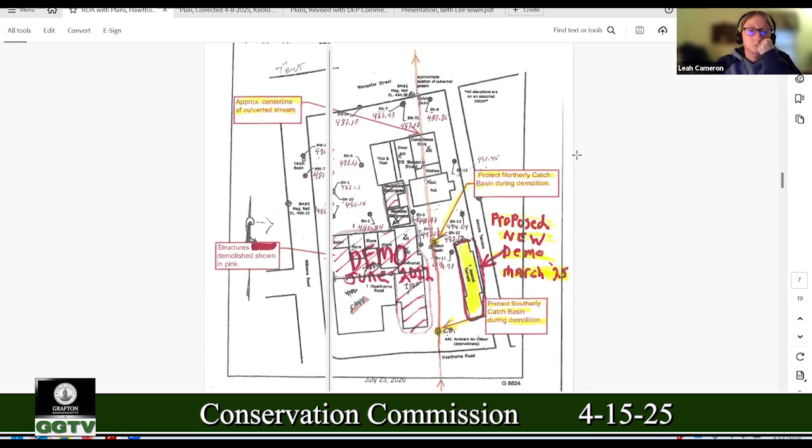Tried to open that one and oh, there it goes. I was gonna say I saw the. We're having weird PDF problems. If you guys ever can't open stuff, let us know. We just got a new Adobe license, so okay, because I was having all sorts of issues getting. Oh, yeah, that's okay, please let us know. I was troubleshooting some with Amira the other day.

Okay, right. So that's a pretty typical silt sack. So he's got a silt sack around, and then he's got a piece of plywood over the top of it, or a weight of some kind. Is that what was the other picture? Right.

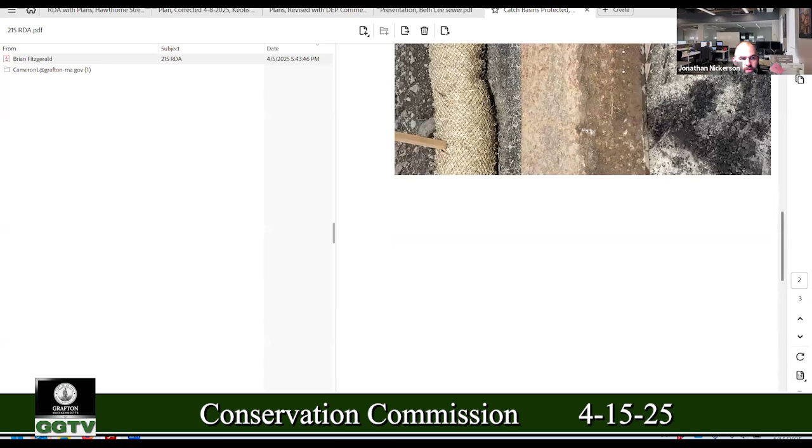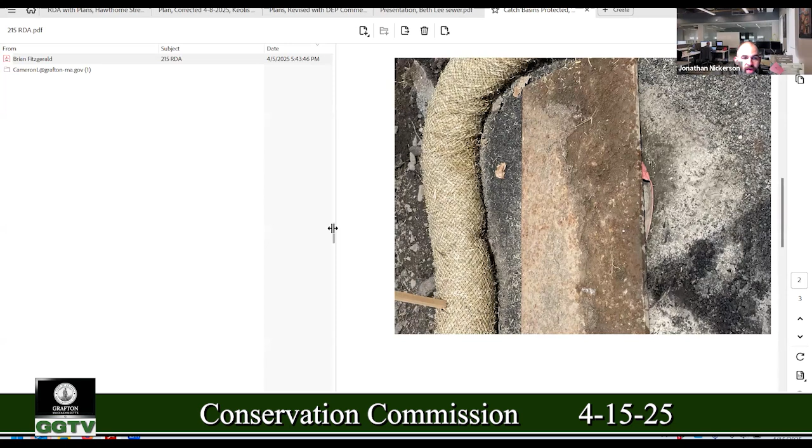Looks like a piece of, I don't even know what that is. Looks like plywood. Yeah. I mean, obviously it rained a little while ago, so I don't know if this will allow water in but not debris. It seems straightforward enough. I'm not trying to make a big deal, but I just didn't know how it was going to work and how long it was going to be in place.

Yeah. I would agree with you that the issue isn't the silt sacks, it's putting something on top of it if it reduces capacity to get in. Yeah, or it might create a minor flooding problem or something if you're not getting enough water into the catch basin, especially with these flash little storms that go by. So I don't think it's an end all. It might just be an adjustment to what he's done with the weight.

I like the idea of trying to keep debris out of the catch basin. And then he's got double silt protection with the hay or the straw wattle and the silt sack. Yep. I don't know if in the past we've done something where the weight is not necessary. I don't know if he put this cover over it because he may have equipment going over it, which is a steel plate where you have it there when you need it and so forth.

So it's not like it's connected to anything. Right. I'm just assuming that when work was not going to take place, he'd probably move the steel plate so the catch basin would work. And then if the work is taking place, he'd have the steel plate over it. But I don't know if we can also just add a condition to our approvals to say that, during rainstorms, the plates need to be taken off to allow for a free flow to the catch basin.

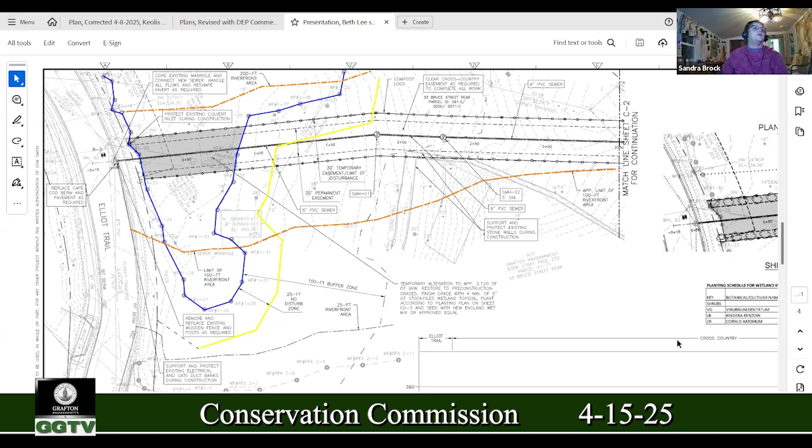So I do have one other question, more of a technical question. Looking at your profile, you're showing that you have done borings out there and so forth. And on the one closest to the existing sewer manhole at the lower end at Elliot Trail, I don't know if it's seasonal high, but the groundwater indicated here is fairly high, obviously, because there's a wetland right there. The piping and the connections that you're using, is there anything special that you're doing to make sure that it's watertight?

So we would be utilizing PVC pipe, which has 14-foot joint spacing, with gaskets to make it watertight. And then the connection to the manhole, we would be recommending a rubber boot, which is watertight as well. So yeah, the intent is definitely to keep out groundwater infiltration. All right, thanks. So the fact that you're using gaskets is the key part that I was looking for, as opposed to push-on or something else. So that was all the questions I had. Leah, you want to do your report out?

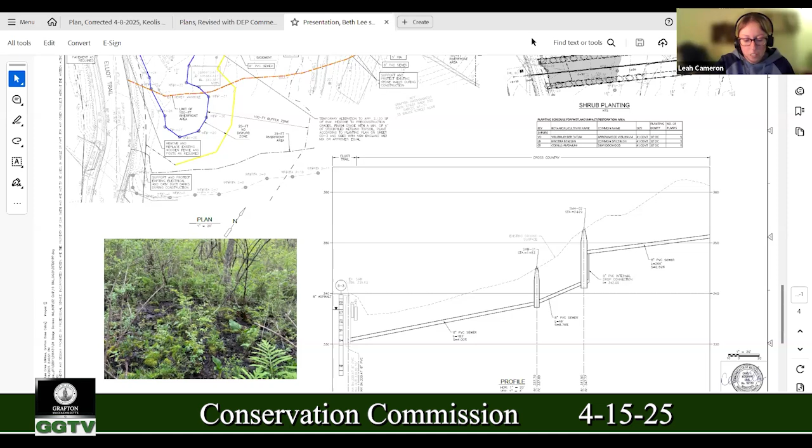So they are still waiting on their DEP number, so we won't be able to close tonight. I did also check the CR that we have in the works with Highfields for the open space, and there is language in there reserving the right for utility easements, so that won't be a problem. Jan, if you can pull up the GIS map for this area. The one question I wanted to throw to the commission, or maybe also to the applicant, is proximity to a potential vernal pool on, maybe not 42 Magill, maybe it's the 33 Bruce Street rear open space. And I just wanted to know how close this is going to be to that vernal pool, and then throw to the commission if they wanted to consider requiring exploration and or certification of that pool.

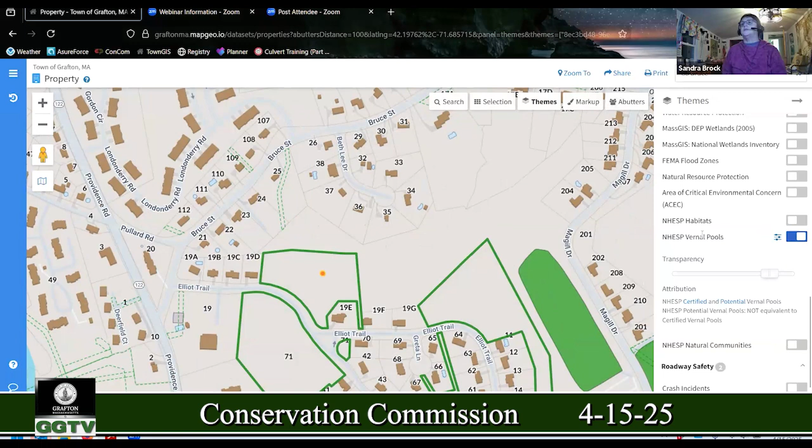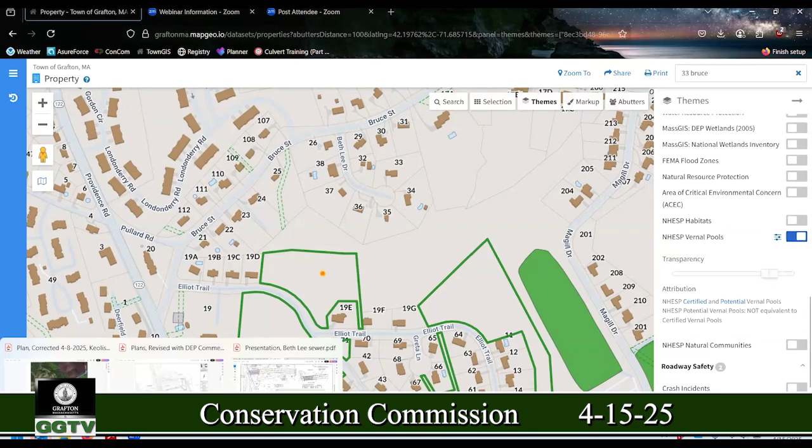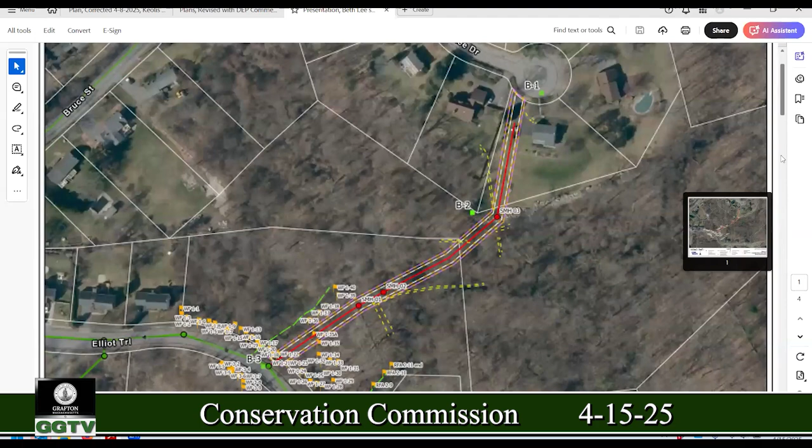Is that a potential vernal pool or a certified vernal pool? Potential. Potential, yeah. I mean, I did not see any indications of, well, there is one area that does pool water, but it's not located that far up. If you go back to the plan, I can show you where it is. Just go back to the sheet, the design plan. See where it says limit of 100 foot, right at the lower end of the blue? That's where there's a little pooling of water.

So I think the one question that Leah's asking is, obviously there's a GIS location on it, and we're wondering how close it is to the proposed work. So it would be, I would say, probably 50 or 60 feet. Okay. So the question is, if it is that close, then it's probably worth just looking at it.

I don't know if it's the right time of year. Actually, yeah, it would be exactly the right time of the year. So at least you could do an assessment of it to understand it. Yeah, I'd be happy to. And then I don't know if that would change anything that you're doing from a construction standpoint, but again, it may just mean during certain dates of migration and so forth that you might not do anything. But other than that, it's really about understanding the location of it, how close it is, whether it is a vernal pool or not. That would be very helpful.

Yes, I can certainly do that. Anything else on that, Leah? Nope, that's all I have. Okay. So at this point, just to kind of recap, we've been presented the technical and the wetlands components of this. And what we'd like to do now is open up to any of the abutters or any of the public, if you have any questions about this particular project or any specific questions about what the process is going to be. Give you a little preview.

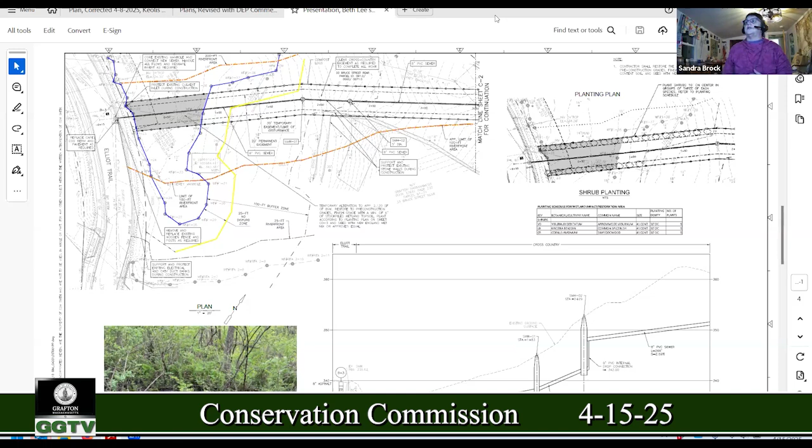So with that setup of what's coming up next, if anyone has any questions or comments, please raise your hand, even if you're just looking to make some comments on this particular project. So Jan, I'll leave it up to you. We have John Riches raising his hand. Please do your thing. Okay, can you hear me? Yes, I can hear you. Excellent. John Riches, 7 Elliot Trail. Thank you. You have the floor.

The proposed project is right next door to my house at 7 Elliot Trail, so I'm probably the most interested person in the neighborhood. While you're checking the abutters list, I wondered what the rules are, because we talked an awful lot about the Beth Lee property and then the McGill land, but the biggest part of it is what you've been referring to as a rear lot from Bruce Street, which is actually part of the Hassamasset Village neighborhood that I live in, and it's owned by the 67 homeowners here. So I have no clue whether the abutters list included those 67 homeowners, because it's their property. We're not actually abutters, we're actually part of the project.

So that's one comment. The second comment is, when I did look through some of the plans online, it seemed to talk about putting stuff back to the conditions that there were before. But now what I'm hearing is it looks like we're going to have a 20-foot road through the open space straight up to Beth Lee, to the backyard of somebody's house. That's going to be planted maybe with some grasses, and it will require access from Elliot Trail, not up the terrible hill in the back of Beth Lee. So it's going to require the easement, which has not been established yet. And as far as I know, you don't have permission or an easement from the homeowners or the homeowners association to do that.

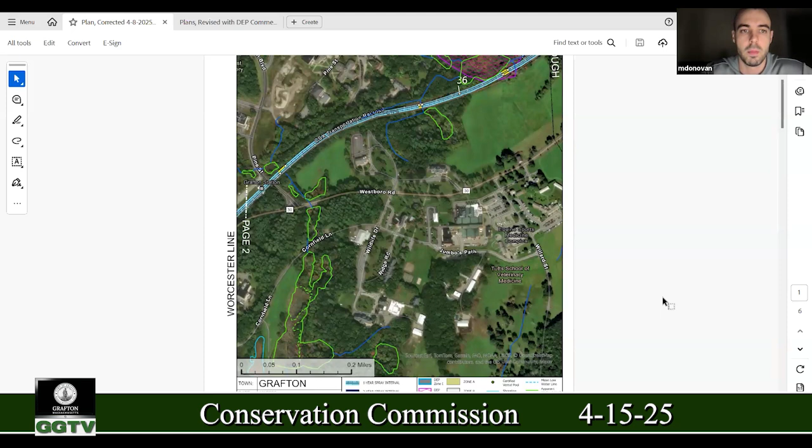So I'm happy to answer any questions about the maps or the work that's done each year, but we are seeking a positive 2A determination to confirm the maps, as well as a negative determination for the work included in the vegetation management plan. All right, thank you very much. I'm going to go to Leah since she has a good report to read out. We do this every so often, but Leah, if you want to just educate us.

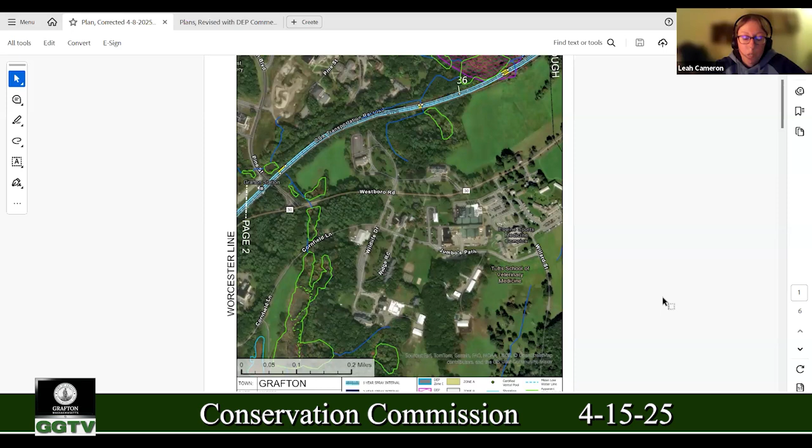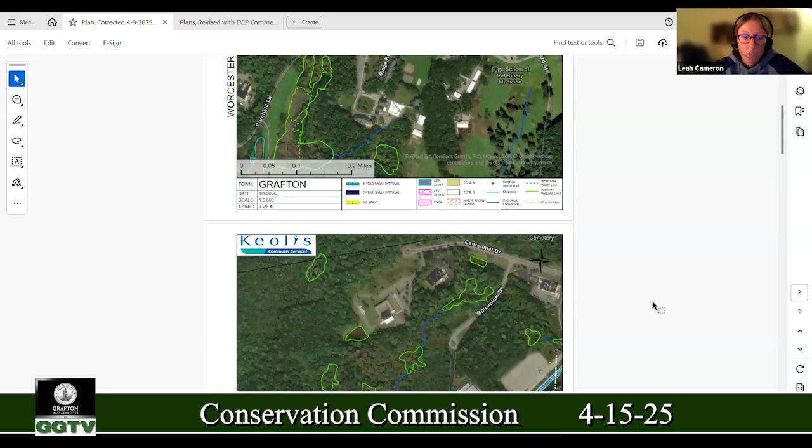Sure. So this filing is under the act only, not our bylaws. We do issue determinations for vegetation management plans in 5-year increments. So this would be a 5-year determination as opposed to the usual 3. The data that they're showing on their maps matches what we have. I have one question on page 2. The area to the west kind of shows yellow on the south side of the tracks, but not the north side.

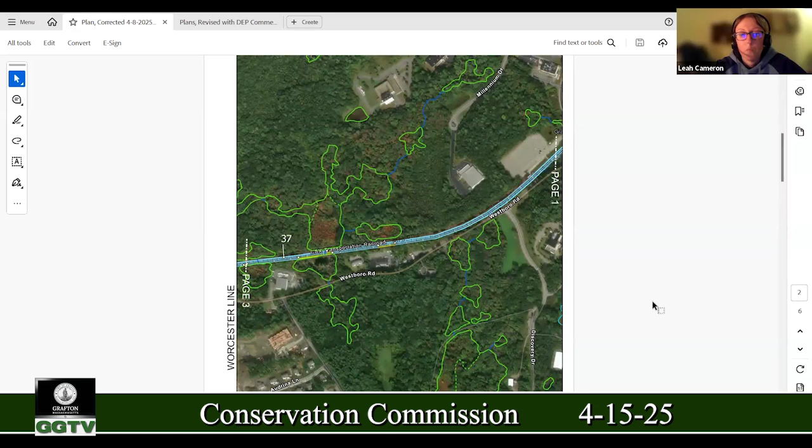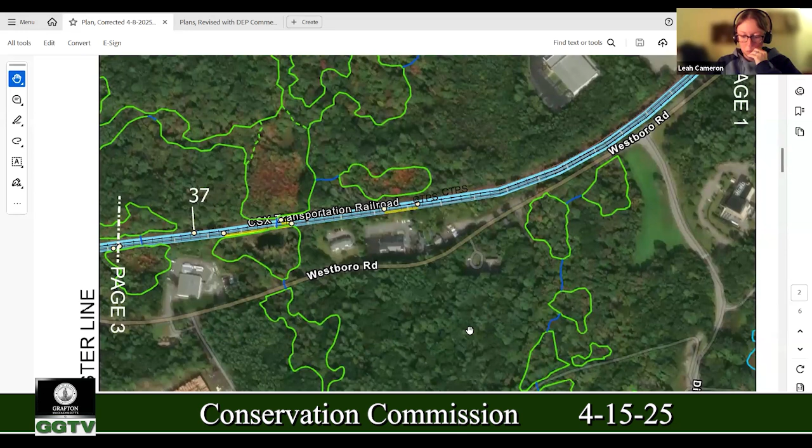Jan, if you can maybe zoom in around where you can see the label of Westboro Road. Zoom in one more time. It's right in the middle of your screen now. The reason I'm asking about this spot is there's a potential vernal pool there, which we might need to compare to the GIS because I don't see the dot for the pool on their map. Sorry, I didn't give you a heads up there, Jan.

So in this area, I would think that in the field, on the north side of the track where it's blue, the wetland would be more than 22 feet away from the center line of track. And when I say 22 feet, it's because from the center line of track, we're applying the solution to 12 feet, and then you need to keep that 10-foot buffer. So when these areas are marked in the field with the plates, that's what we're looking for. So I would assume on the south side of the track, it's within that 22-foot buffer from the center line of track, as opposed to the north side.

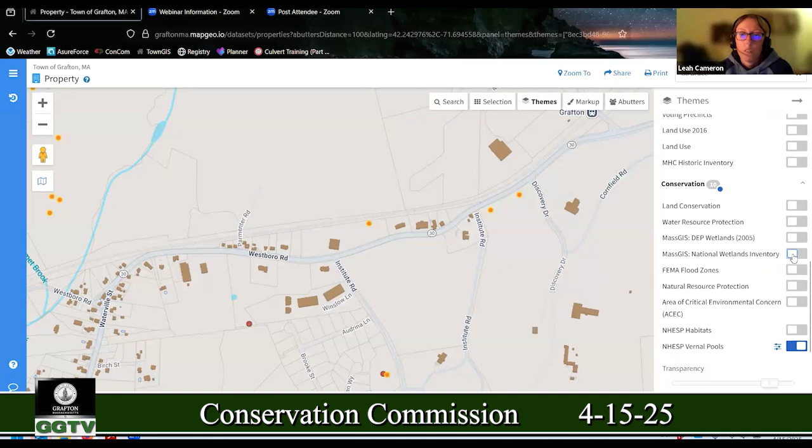And then obviously at the culvert, both sides are yellow, near where it says CSX Transportation, in the TRA area of the transportation word. Does that answer your question? Probably. I just need to take a quick look at the GIS if you're able to pull that up, Jan. Just don't quite remember where it fell. If you can turn on the National Wetlands Inventory, then the shapes should match.

Okay. So it's the one to the right, let's see. Institute. Yeah. Right. The one in the light green. Yep, pool. That was the one I was asking about. So if we can correlate that back to the plan. It looks like there was a yellow area there. Nope, it goes just to the right of that, just where the CTP is. It looks like you can see on the aerial that there's a flat area that could potentially be a vernal pool.

Hold on, it would be good to just overlay it, yeah. Let me see the building, and let me look at something in the background here. Oh, Institute Road is over here. Okay, this has Discovery Drive on it. I'm wondering if I called out the wrong plan sheet. If you want to do your questions while I figure this out in the background, sorry about that.

Sure. Again, this is something we do on a regular basis. It's great that staff goes through this with a fine tooth comb. So I will go around to see if anyone has any comments or questions. I'll start with Travis since I kept calling him out the last time, but this time I can actually call him out. No, I don't have any questions. Okay. Amira, do you have any questions?

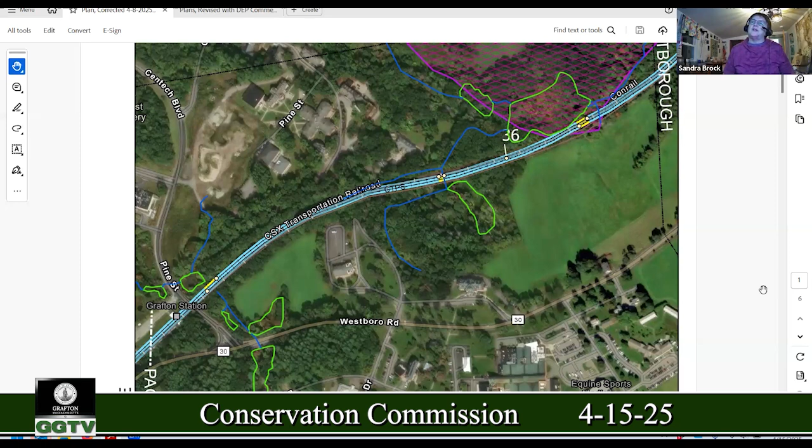All right, great. Jonathan. I don't have anything. Yeah. Thank you. I don't really have any questions. Leah, anything else as far as the vernal pool? I think I was off on the new construction. I figured it out. Yeah. If we can go back to sheet 2, it is sheet 2. I was just confusing the road with the railroad. So the potential vernal pool is just south of where it says CSX. Okay. So on GIS, it is the one in the light green pool.

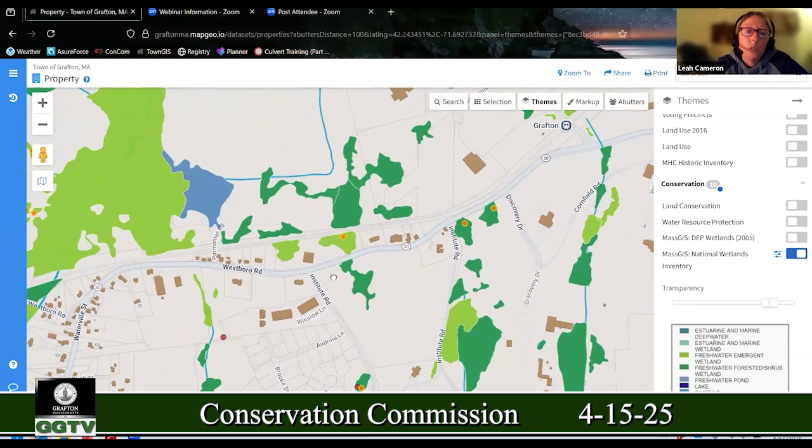And if you go back to the plan, see the words CSX on the track, and then south is like a nice open pool of water. It's that. So the yellow does correspond with that. I was just thrown off by Westboro Road versus the train track. That was all. Gotcha. Not a problem. And just while you did bring that up, I did go into the regulations to confirm that for vernal pools, you do need to keep that 10-foot buffer as well.

And just to also add, we do send these maps to NHESP every year. We send a yearly operational plan with the maps to NHESP, just to add to that. All right. So Leah, anything else if you want to go through your report? Sure.

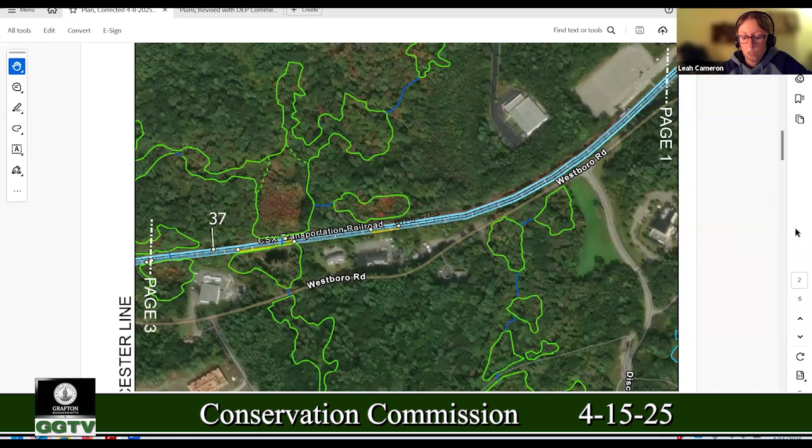So I listed 3 provisions from the regulations that we can cite as findings. 2 of them point to basically the process that they're going through tonight, which is to obtain a determination from us for the boundaries. Those are the first 2 citations. The bottom one is the citation that shows that they're exempt from the riverfront requirements. So I would suggest putting all 3 of those in a finding. I'm also recommending the issuance of a positive determination 2A as requested, that confirms their resource areas. And also the negative determination number 5, which again points back to the exemption from those riverfront regulations.

All right. I don't have any other questions. I'll just open it at this time to the public. If anyone has any questions or comments about the RDA for the CSX Railroad right of way, please raise your hand. Otherwise, I'll do a quick round of commissioners to see if they have any other questions. Jonathan. Nothing else. Thank you. Travis. Nope, nothing else. Amira. I have one quick question. I'm sorry if this has already been mentioned, but what herbicide were you all planning to use?

It varies every year. There's a list of maybe 10 or 15 herbicides provided by Mass DAR in association with Mass DEP. They've done studies with these herbicides and only provide the ones that pass their test. There's a lot of research behind it that tests the absorption rate and the flow rate. So

from that list, the applicator will make a mixture every year, and it does vary. What I've been told, to put it simply, is that they vary from this list every year, because the vegetation can build up a resistance if you use the same exact mixture every year. But we do provide the exact mixture to your commission in the yearly operational plan that we send every year.

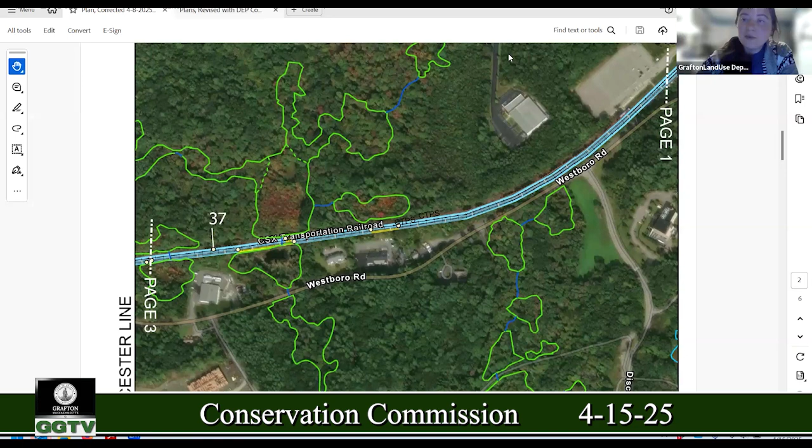Awesome. Thank you. No other questions. All right, great. Other than that, anyone, Jan, from the public? Nothing from the public. Okay, based on that, Leah, I don't think we have anything else. Nope. Okay, so then we're looking to a motion that includes what we already discussed as far as the filings and determinations. Do I have a motion?

I'll move to close the hearing and issue a positive determination, number 2A, and a negative determination, number 5, along with the other findings as discussed. Thank you. Do I have a second? I got a motion, a second, roll call vote. Travis, since you're on my screen. Yes. Jonathan, yes. Amira, yes. And I'm also a yes.

Alright. Thank you very much, everyone. Have a good night. You too. Thanks, Leah, for having everything prepared. You're welcome.

Okay, so next up is, I just need to bring the right thing up. Here we go. Next one's a continuation on 200 Westboro Road. I'm going to read this in. At a certain point, I will recuse myself, but they've got a little bit of housekeeping to take care of. So, pursuant to the Massachusetts Wetlands Protection Act, Grafton Stormwater Management Bylaw, Grafton Wetlands Protection Bylaw, the Conservation Commission will hold a public hearing to act upon a notice of intent application for a Grafton Stormwater Bylaw permit and application for a Grafton Wetlands Bylaw permit for the construction of a parking lot at 200 Westboro Road.

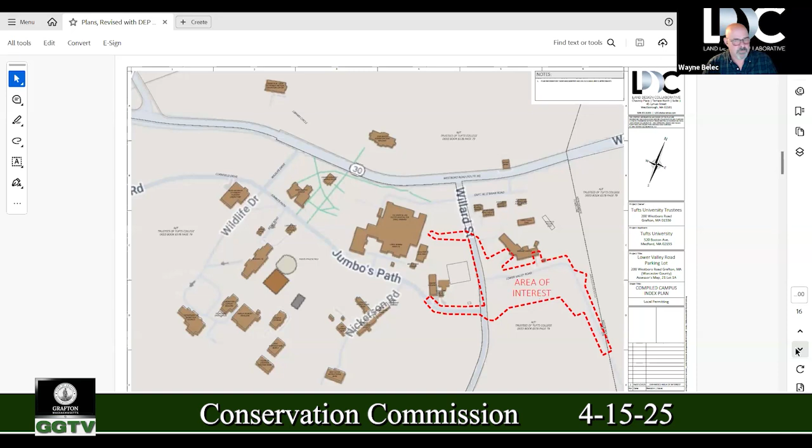So if you wouldn't mind scrolling back up to that previous sheet there, Jan. So this is the existing conditions plan, beautifully done, Jan. So what you see here is a reprocessed asphalt paving parking lot. It's basically millings. Unlike typical paved parking lots, RAP parking lots typically have a little bit of tar in there which causes it to bind. This doesn't bind, it's somewhat soft underfoot. But this was a temporary measure installed, as I understand, last August of 2024.

The site generally pitches, as you can see across the parking lot, about a 5% slope throughout the property. In this particular area, like I said, it's about 4.35 acres within your jurisdiction as part of this project scope. There are 2 wetlands, actually 1 wetland system, but 2 areas of flagging. There's an open meadow, if you folks are familiar with the area, that is denoted in the field by wetland flags A1 to A31.

That area in there is pretty much a reed canary grass and a yellow foxtail vegetation. Again, hydric soils, evidence of hydrology based on the swale and the hydric soils.

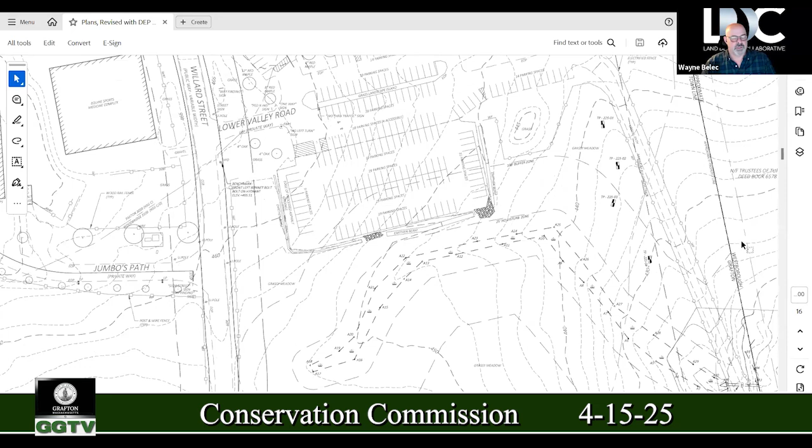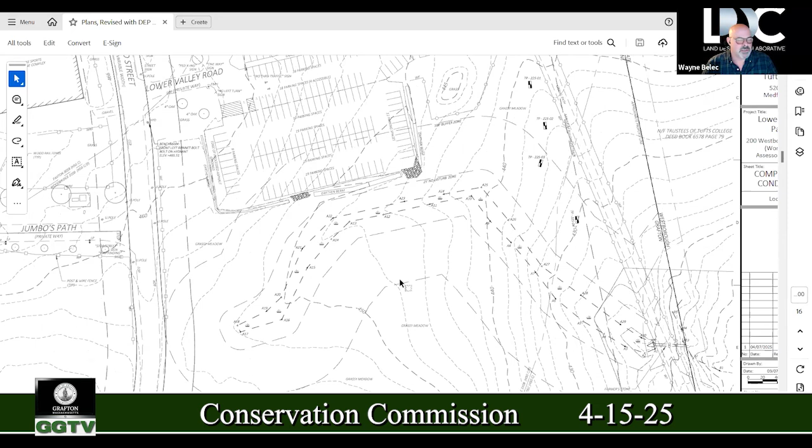Over to the east on the other side of the culvert is the B series of wetlands, and the canopy is a red maple swamp vegetation. The shrub layer is comprised of, I think, elder, common elder, and honeysuckle, and then the herbaceous layer is reed canary grass as well as skunk cabbage.

That particular culvert, so I'd like to get into what's actually happening out here, seeing that you folks are the permitting authority for stormwater and for the wetlands bylaw as well. So this particular site, if you look at the way the site flows, it flows essentially from the west to the east through the swale, and as you can see through the contours in the parking lot, it flows down toward the wetland.

To the east of the parking lot, you'll see a circular or oblong shape topographic feature. That was an effort to create a stormwater attenuation type system. And what they had done is they created a kettle hole in there. There was no outlet to that.

And I know the intent was, along the paved portion of the site where it meets with the asphalt millings, there's runoff that comes down through that area, continues down to that gravel driveway, which is to the east. And that runs basically north to south over the culvert and between the wetlands. So basically what has happened historically is the stormwater runoff would flow to that area and cause washout up above.

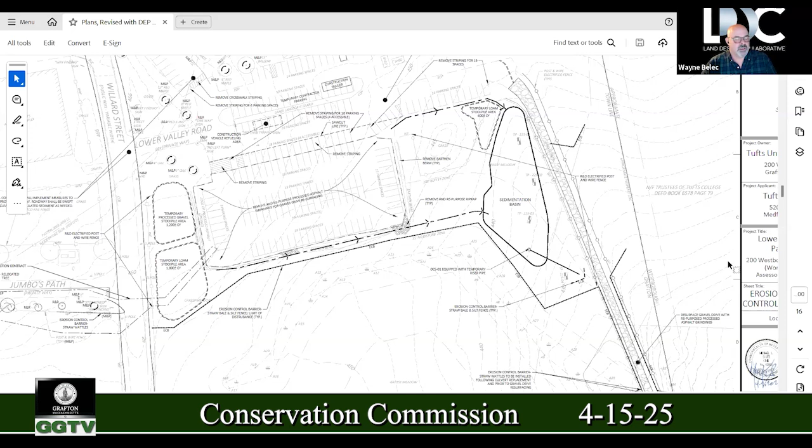So the way this would work is the very first thing that we would look to do is employ erosion and sediment control barriers. So down at the southeast corner of the property, you can see that we are proposing erosion and sediment control barriers on the down gradient side of the culvert, on the up gradient side of the culvert, and then we're continuing the erosion and sediment control barriers in a northwest direction on either side.

And as we're on the west side of the gravel road, we are continuing the erosion sediment controls in a westward direction. The very first thing that we would do after installing that is we would prep the sediment basin. That sediment basin is going to be the future home of the stormwater management, infiltration, and gravel wetland area.

And we do that obviously because once hydrology changes on site, as you folks know, things can go crazy. So we like to address this early on to ensure that there are no increases in the peak rate of runoff or sediment-laden waters traveling downstream. As part of this, we would install the pipe to the stormwater basin, and that would be equipped with a temporary riser standpipe with a filter fabric and stone.

And then we would look to go to the millings parking lot and look to work with that. Now, because there has been a history on occasion of gravel having been washed out, particularly up above, and some overtopping down below, we decided that we would take these millings and repurpose them. What we're looking to do is propose to repurpose them over the gravel road to stabilize that a little bit more. That would keep any sediment that may travel from the gravel road downward. That would just ensure that it stays underneath the millings, similar to the effect that it's having here.

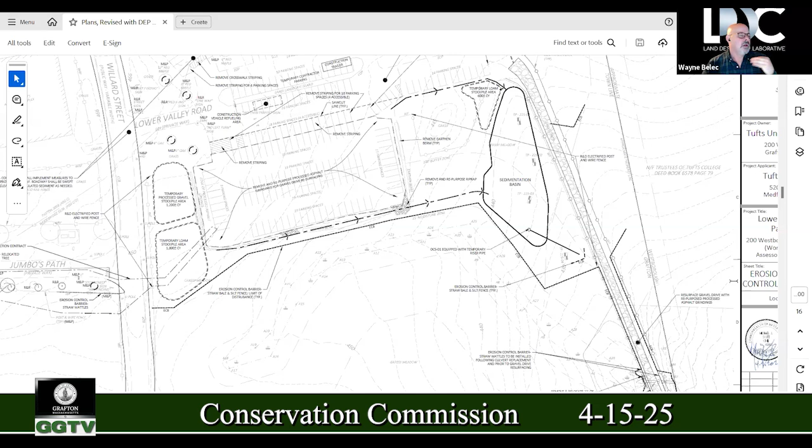And speaking with Jan and Leah, we've had a couple meetings with them and with town staff. One of the things here, which is critical, is timing. As you folks know, we've all been to school. In order for them to have this construction work done, logistically, it has to happen in the summer. The construction start date is going to be in the middle of May and run to the middle of August, where they're looking to have everything buttoned up so that the students can come back, park here, and continue to use the campus. If we could now switch, Jan, to the next sheet, please.

So this sheet shows the layout materials plan. This basically shows the limits of the pavement. It's going to be a bituminous concrete parking lot. We're going to have some islands in here, obviously, with lighting and the typical things that you see with a parking lot. This parking lot is an ancillary use to the campus.

They had a need for parking. And so what they have here is they're providing another 150 spaces to the 959 that they have out there currently. So this will allow for students, faculty, and visitors to park here. This is going to be referred to as the Lower Valley Road parking lot, so that they can migrate westward to other points of interest.

As part of this, what you'll see is in the lower southwest corner of the parking lot, we are proposing a walkway that crosses Willard Street and then continues up Jumbo's Path on the south side of Jumbo's Path. Likewise, we would look to have a sidewalk that's going to run from the parking lot, the west side, northward toward the Bernice Barber building, and then continue through a new sidewalk. Again, all that is out of your jurisdiction, but that's just giving you some ideas of what this is going to look like. And then that will continue over to the small and large animal hospital.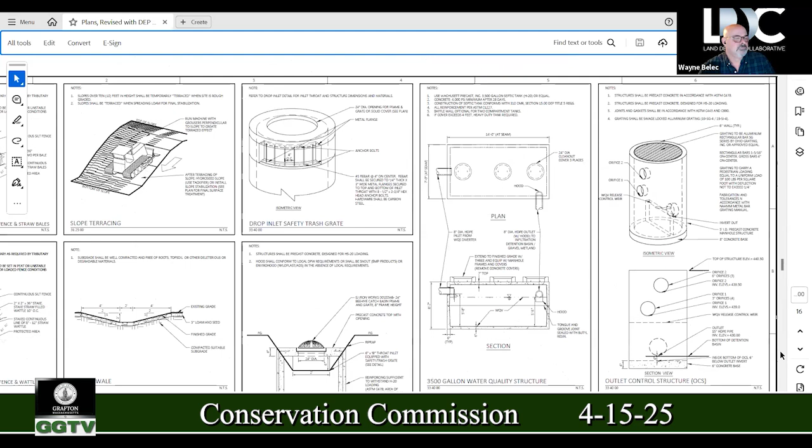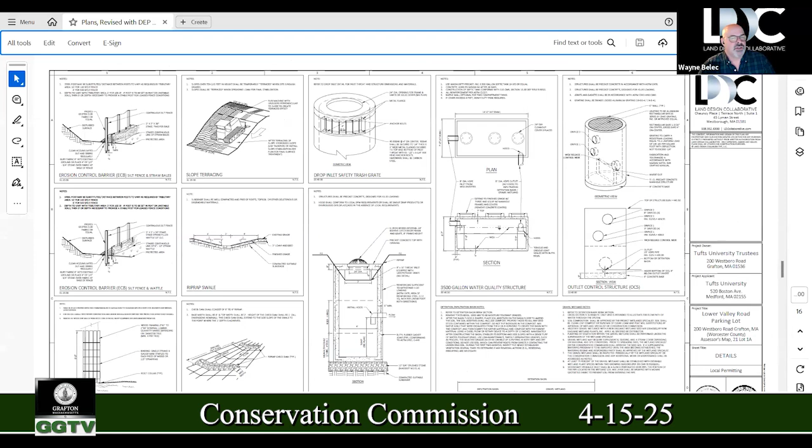Maybe the one after that one. So actually, if you want to look at this one, upper right-hand corner, if you could go back to that, Jan. So that sheet, that cylindrical object there, that is our outlet control device. If you could pan, there you go. So you see the grate on top, that's the outlet control device of our basin.

If you look in that cylindrical section, you see that rectangular shaped dash line thing in the lower portion of it. That is our weir control device. That top of that controls the elevation of the water for the gravel wetland. So that everything below that keeps that gravel wetland fed and lush. If you could zoom out, please, Jan.

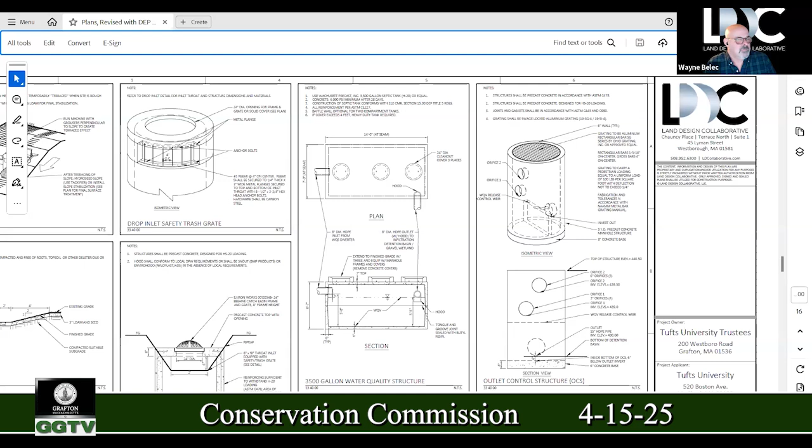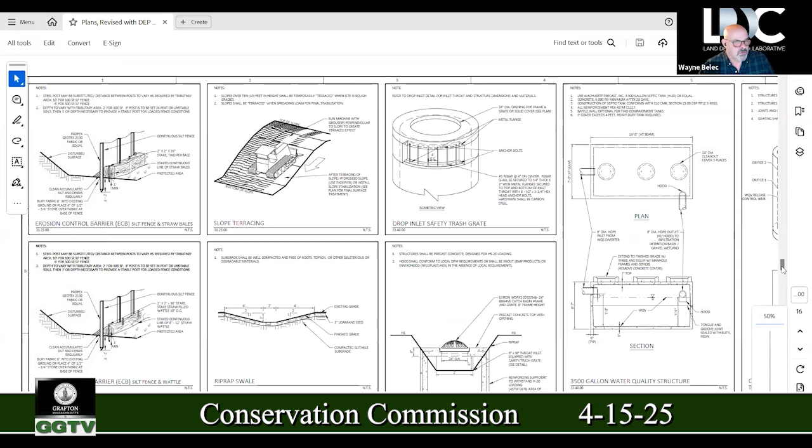And scroll down, please. Okay, so here's the, there you go, bottom of that sheet. Bottom of the sheet is the cross-section of the gravel wetland. And I show you this only so that you folks can see what this thing looks like. It's a pretty neat design. I never designed one until this town.

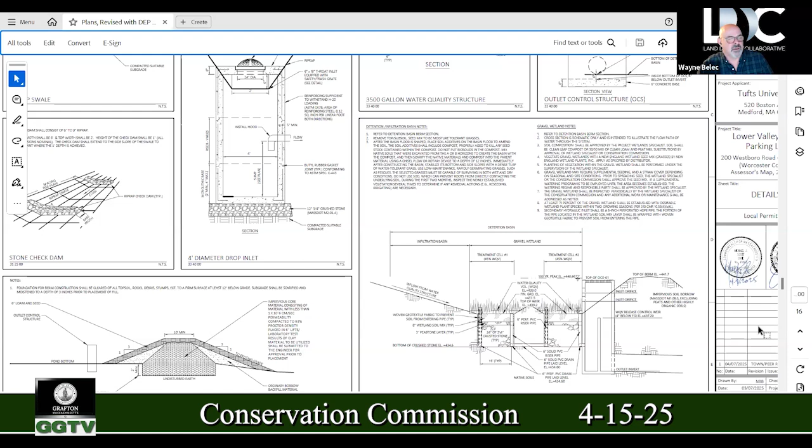It was Sandy Brock on another project where she had asked me to think a little less gray and more green. And that was 5 to 7 years ago. And ever since then, I've been doing things like this. So like I said, this particular system interconnected with pipes, 2 cells with 45% water quality. You can see on the top, the wetland vegetation and the weir device inside the outlet control structure. Next sheet, please, Jan.

So this sheet, interesting. This was a comment raised during the review of the project. Everybody weighed in on it. Jan and Leah weighed in. They had some concerns about some of the things we were doing. One of the things was the BVW. In our initial iteration of the drawing, we were basically kissing the BVW, but when you looked at it, it was a little bit more than a kiss.

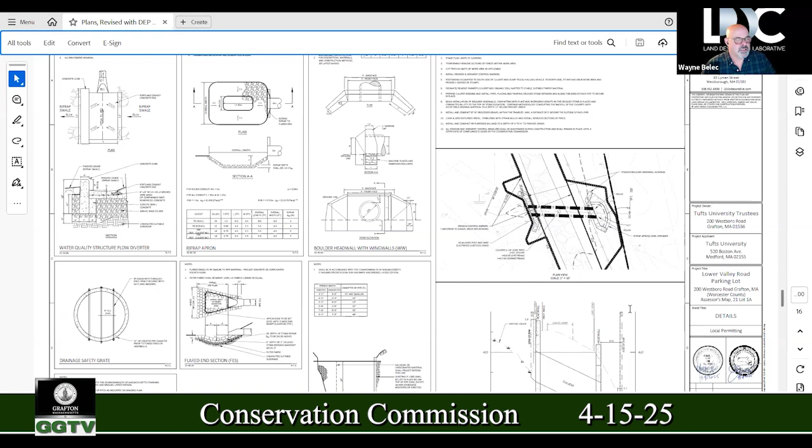So we said, okay, we're going to pull this back. We're going to shorten the pipe culvert from 35 feet to 32 feet and honor the edge of the BVW. That's what this represents. Leah and Jan had asked that we provide a profile of this section so that it could be demonstrated that we were not altering the BVW on either side, but rather honoring it and maintaining a distance. So that's what that represents there. If you could, Jan, please go to the next slide.

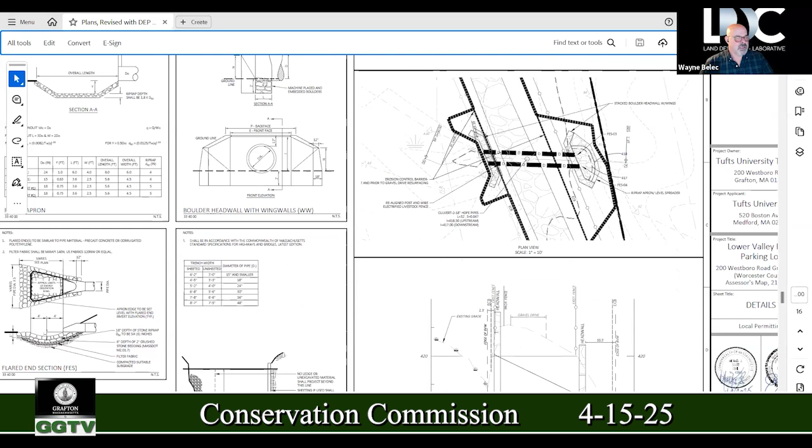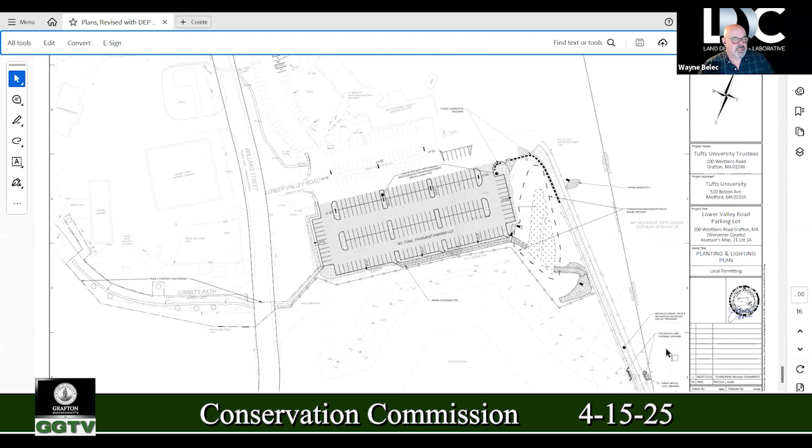This is layout materials, nothing of interest to you folks. Next one, please. That's really not much either. Next one, please. So this is the planting plan. So when we were meeting with town staff, a couple things had come up during the discussion, and under the campus development overlay district, the planting requirements for parking lots differ from that of other districts in town. They don't really have a parking lot landscape requirement.

We had initially proposed some trees in here, but after we started talking with town staff and learning of some of the honeybee population in the area, not only here, but at the Willard Clock Museum and neighboring properties, it was decided that in lieu of trees we would propose a wildflower mix in the islands and around the perimeter of the site to promote some more activity on campus and for other hives in the area. So that's basically what we're looking at from a stormwater perspective.

In terms of the pre and post development runoff rates, we decrease in all cases. We are proposing that the culvert down below is going to be replaced with two 18-inch pipe culverts to convey water so that we don't have the ponding situation. We are required to design for the 50-year storm event, which it has been. The pipes will be free flowing, not operating under head.

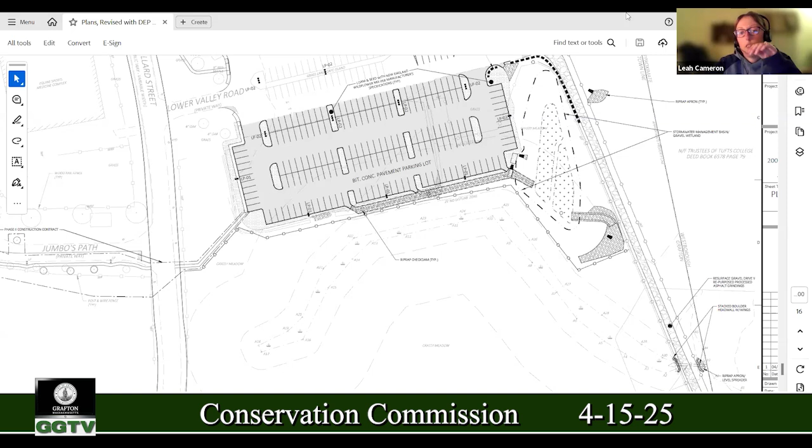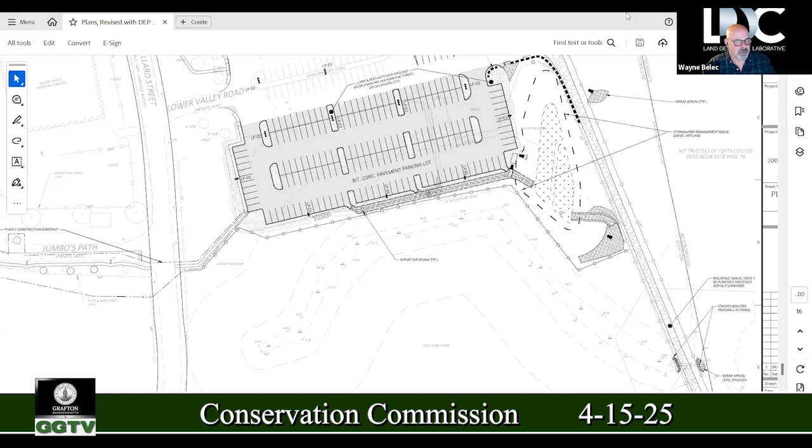You mean not the within the basin part? Yeah, I don't think it makes sense to me. So they want to be looped into the erosion control inspection. The basin part, they're just suggesting that we do it. Okay, I just wanted to make clear, because I know Westboro, you know, how they operate. Being a resident there, a resident company. Okay, thank you. All right.

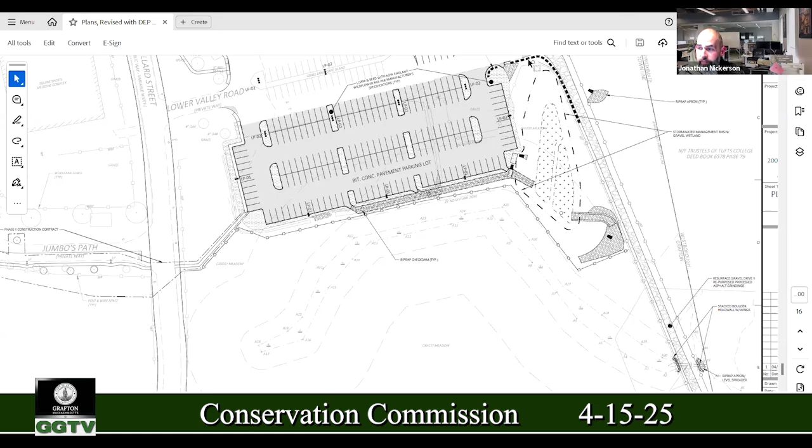So that being said, it doesn't look like we've got any comments from the public, Jan, and I don't think we've seen anything that we need to address. No, nothing from the public. Okay. Amira or Travis, any final questions or comments? No final questions or comments. Okay. That being said, do we have a motion to close the hearing and issue an order of conditions with the conditions noted and the special conditions noted for 200 Westboro Road, Tufts University for the parking lot?

So moved. Do I have a second? I'll second that. Got a motion and a second. I'll do a roll call vote. Amira? Yes. Travis? Yes. I'm also a yes. The motion passes. Thank you very much, Wayne.